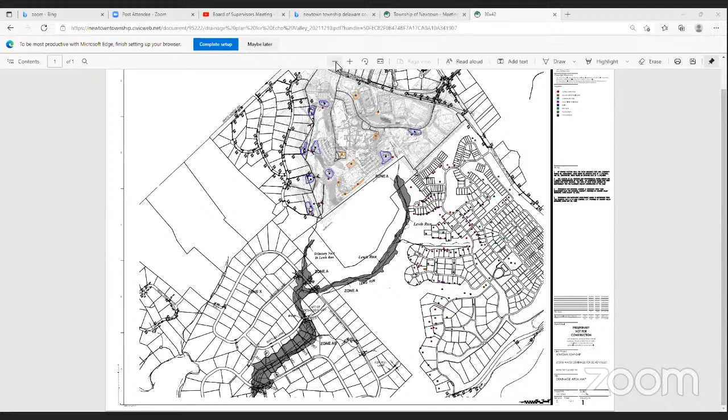Okay, so to the left is the Whitehorse development, you can see, and if we can zoom in, let me see—so you can't give me control now, Stephen? I don't think you have control of the mouse.

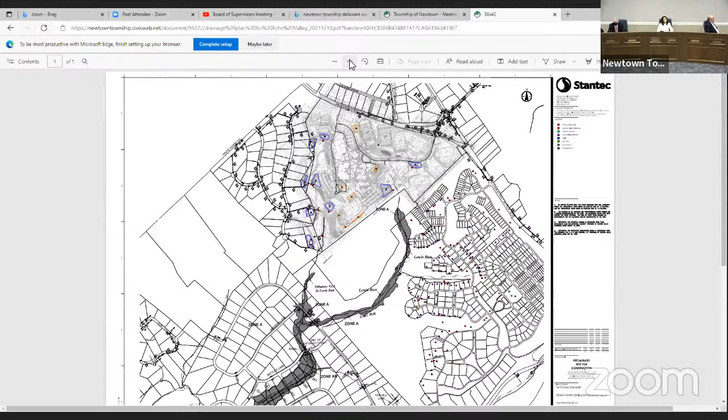Okay, if you could zoom in—yeah, Whitehorse is right off of Whitehorse Road. It contains Bridle, Withers, and Farrier Lanes. The 4 basins are positioned along that tributary that drains down into the 50-acre preserve and then into Echo Valley. As I mentioned, those basins are collectively providing almost 50% more volume than they were intended to do in the design.

Due to the timing of the approvals for that project, because of when it was proposed, it's not part of the annual inspection program that we have, which was set forth in the amendments to the stormwater ordinance in 2013. But the exhibit on the east side of this tributary shows the development of the school's campus with a variety of control facilities, including 8 infiltration beds, which are shown in orange.

They are the ones more integral to the specific locations. There are also 4 conventional retention basins and 1 wet pond that the school uses to actually irrigate their fields during 8 months of the year.

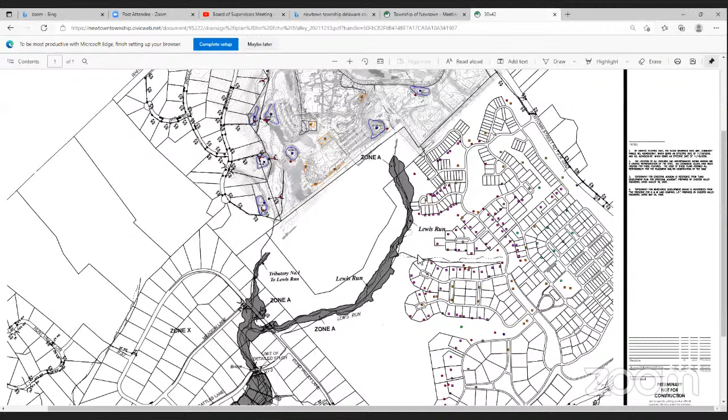Over the past year, we've performed periodic inspections and site visits to ascertain the proper functioning of all of this in the 600 some acre drainage area. It's just about a square mile that drains down to the confluence of the tributary to Lewis Run and Lewis Run, right about the intersection of Echo Valley Lane and Meadow Lane. It's very close to there.

Of note were the visits we performed on September 2nd following Hurricane Ida, and again during a storm burst that was fortunately during the day on September 23rd. On the day after the hurricane, every basin in the township, and especially in this area, was observed to be nearly full, but not overflowing, and appeared to be functioning properly.

During the storm on September 23rd, observations showed the collection of flow, most especially within the Whitehorse development and the series of inlets they have there, being very effective without any bypass. As engineers, we do calculations for the spread of flow along a gutter line.

PennDOT standards are set up so that if you have more than half of the travel lane inundated with water, you've got to provide another inlet. I saw zero cases where any flow was even escaping the inlets themselves, and they only stick out from the curb line by 2 feet. So my observations in this entire drainage area show that everything is functioning properly.

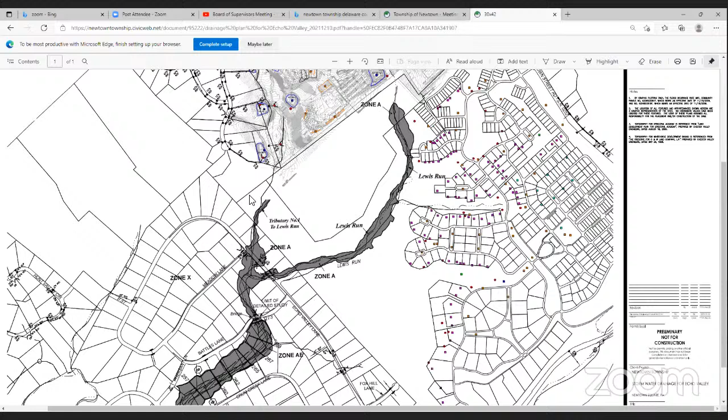Eileen: So the area behind the 50-acre preserve, right there, that whole little rectangle, the L shape that goes behind there, there's significant washout, there's significant trees falling that weren't like that 10 years ago. So what do we attribute that to?

Well, it does happen in natural areas even, and we're experiencing that all over the township. It's attributed, I believe, to the more intense, frequent storms.

Okay, but those three large basins for Whitehorse are right next to this area where this is happening. And the other area is the preserve, where obviously there's been no development. That's all green. So the only development is the Whitehorse side and the pond. Whitehorse and Episcopal both drain down into the 50-acre preserve.

I can't tell from that because there's no grades, but there are elevations on the portion that contains Episcopal. They are all elevations, you see the shaded steep slopes? That area comes down on that portion, a tributary to Lewis Run, with a lot of water coming down from there that wasn't coming down 10 years ago before these guys were developed.

So the question is, are you sure those ponds are operating properly, letting the water out on a timed period? Because to me, the only way you'd have that much significant rain and washout is if these ponds or drainage facilities weren't operating properly, because they should be capturing all that water and letting it out over time, correct?

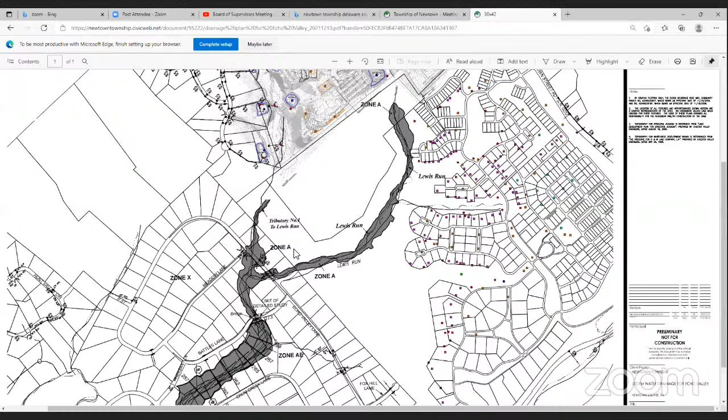Stephen, if you could pull the map down again just to show Whitehorse itself. You can see at the upper part of the map, the first basin, the system from the cul-de-sac goes through the yards and is piped to that basin, then discharged into the tributary. The next system discharges to the basin and then into the tributary. The third one is at the intersection of Bridle and Farrier, goes to the third basin, and the end of the cul-de-sac takes it to the last basin. Everything is being collected and taken to that point.

Could it be too much water's coming off Episcopal too quickly? Because they don't really have a lot of basins there. But every project they initiated had either an infiltration bed, or an infiltration bed and a basin combined.

How do we know the infiltration? How do you test the infiltration bed to know it's capturing the right amount of water? Again, by the collection system. If it's functioning properly, which the inspections show it is - there was one bed along the headmaster's house, right where the arrow is, yep, that one. When we looked in there, there was some trash and debris, because things get into inlets. We see it all the time, but nothing to impact the capacity or the ability to infiltrate. It just needed the chamber cleaned out.

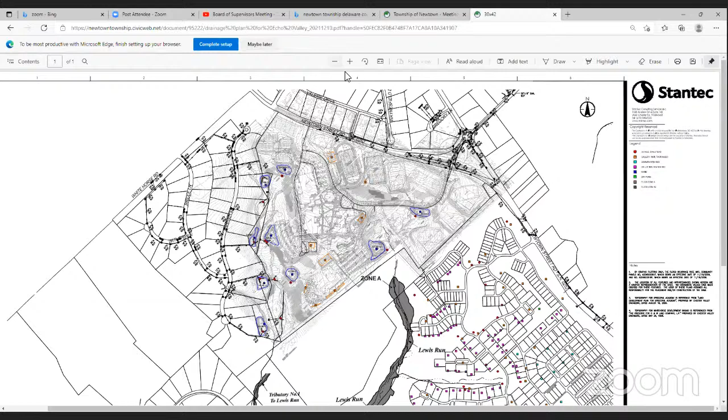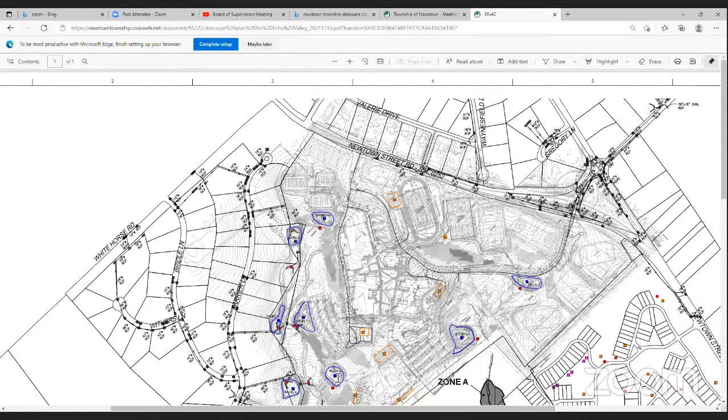I'm just thinking there's still too much water coming off in a big storm. I was actually surprised on a couple of site visits that there wasn't more flow in the basins - I think it's Basin A. I was surprised at that, but what I saw was that infiltration was actually working, and that's why the discharge didn't result in a substantial amount of flow in the basin itself. Because I had expected after Ida especially to see major amounts, like I did in other locations. That told me the infiltration bed was doing its job.

I think we still need to visit that again. I think there's just too much water coming out of that property that wasn't coming out before, at too fast a rate, because there wouldn't be that much erosion otherwise. I have a creek behind my house, been there 15 years, and it's basically the same as when I moved in. The one that comes out of Episcopal into Echo Valley, there's severe erosion there - severe erosion.

Something's got to be causing that. To my mind, it's volume, flow - too much flow too fast. So it seems like whoever designed that might have designed it to meet requirements, but it's not meeting the requirements because it's washing out the properties below it.

The entire Episcopal Whitehorse property was all done by Chester Valley engineers. You have to have a meeting with them and have them come out here and look at what we're talking about and say, hey, listen, 10 years ago it wasn't like this. I don't care what your design says. People make mistakes and there's a mistake there.

We have people in my neighborhood that have significant erosion - I mean, significant. I'm on a creek and I don't have that erosion. I've been there 15 years and I maintain it, I clean it out. If there's trash, I clean it out. If there's trees that fall in it, I take them out. And what we're seeing here is significant erosion, and it's coming from Episcopal.

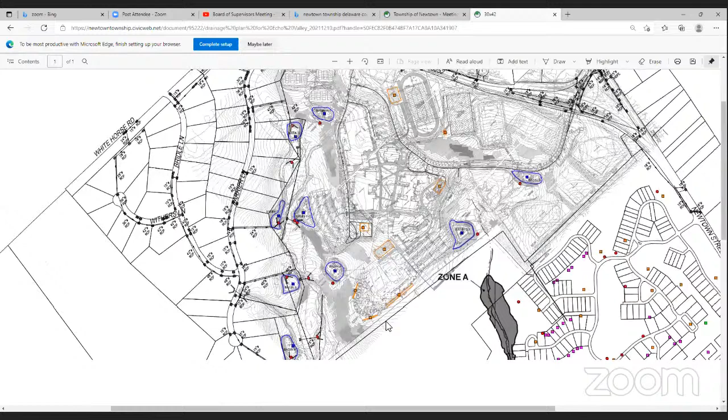I don't know if it's coming from Whitehorse - they have a lot of big basins, but it's coming from Episcopal. I do believe the basins associated with Whitehorse, because the overall project initially was done for all residential. I think that Basin F up top near the tennis courts may have actually been designed for the residential area first, because it was before my time - I don't have that firsthand information.

I think we need to have a meeting with them come spring, and we need to have a come-to-Jesus meeting with them and say, hey, listen, you're causing significant runoff. You're causing major erosion. I don't care what somebody's calculations say - calculations are wrong. You can't see the erosion like these people are getting in their yards, coming closer and closer to their house that they didn't have when they bought that house 20 years ago.

I don't care, it's the development's upstream that wasn't there before. So if their development is impacting these residents, then they have to fix it. If they had to put a big basin at the bottom and have it slowly drain out over time, that's what they have to do. I don't care what the plan says. I don't care what was approved.

It's significant erosion. I don't have that erosion. I live off of - I don't know what one I'm off of, but I'm off of right where it says zone A, B - and I don't have that erosion. I'm right off the old road into the estate, into the old Echo Valley estate, and I don't have erosion. The water goes up 3-4 feet and goes through there in these big storms, but it doesn't erode anything.

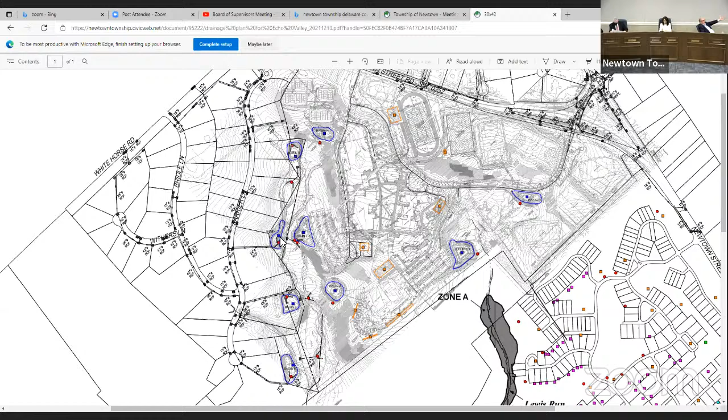So again, the water that's coming off of Episcopal needs to be investigated. If they've got to get Chester Valley out there to look at this, we need to have a meeting with them, and we've got to say, what are you going to do to fix this? It's not right to these neighbors that are getting major erosion by their houses. It's just not, and it's obvious where it's coming from. We've been talking about this now for 3 years, 4 years - it's time to act.

That's just my opinion as one person, but it's not right. There is a problem - I don't care what the calculations say, I don't care what the design says. The problem is you see it's getting worse. I'm in the same development and mine isn't getting worse. So what does that tell you? It tells you that whatever Episcopal did, it's not working. It's obvious.

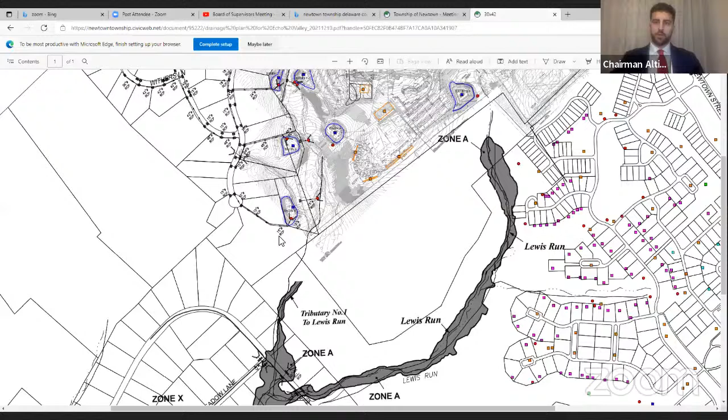So Eileen, what's the purpose of this presentation? Are you coming to us with a solution, or is this just informational? This was only information.

There are questions as to whether these work or not. I can only speak to as designed. I understand, but we need to have a meeting with them. It's way past the point that it doesn't work. There are solutions calculated on paper that don't work in reality in many situations, and this is one of them.

Maybe you're right, maybe it was designed for residential where there's a lot less impervious coverage, and maybe that's what happened here. No one ever caught it or checked it. You weren't involved then, who knows who checked it or what was missed. We don't know, but it's obvious when they're getting this major erosion, it's getting worse and worse.

And in the same development, on a different spur, that creek system is not having the same problems, and they're getting just as much rain. We're in the same neighborhood. Mine's not eroding anywhere near the pace that this is eroding.

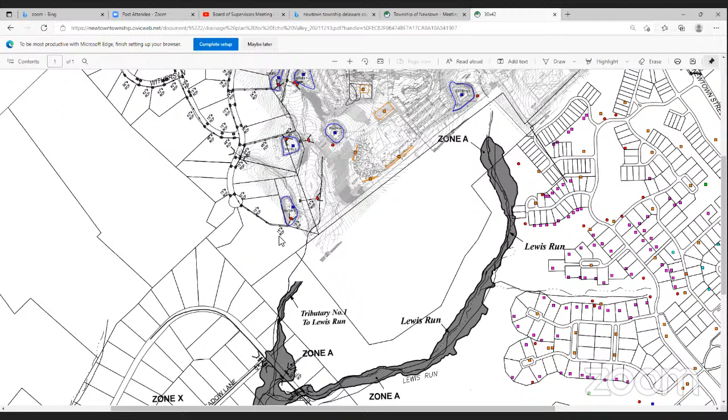Where it says 269, is that where you are? Right around the bend? Yeah, I can walk that whole thing and it looks like it did 15 years ago.

Well, that's kind of good news, because initially there was a lot of concern that what was coming in through Fox Hill and that tributary was a problem too, from Episcopal. So if that's the same, we can focus our efforts exclusively there.

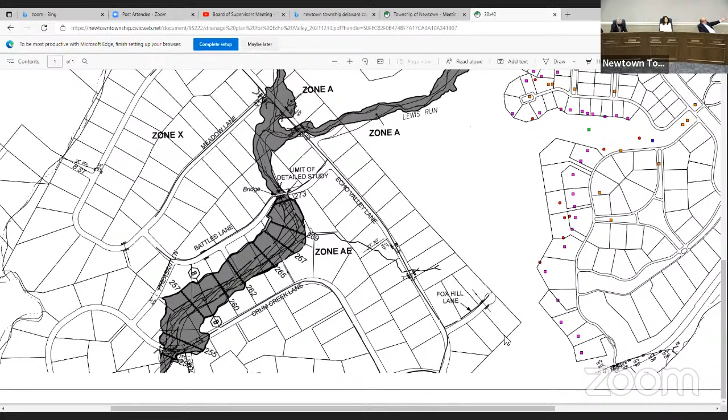If you look at Fox Hill Lane, that property has a huge area of trees, a huge planting right along Goshen Road. That whole area is a huge green space, and the houses there are bigger with mostly green space yards. The driveways are very small, and even though the houses are big, they're far from the property. They have all those facilities and green space, they planted trees, so there's all that green space to absorb the water. Whereas if you go over there, you have so much concentration right at that point, and it's all developed. There's not a lot of green space there.

Again, I don't know, maybe you're correct, and maybe since you weren't here, it was designed for residential with a lot less impervious coverage. It was never adjusted and no one ever caught it. It was a mistake or an oversight, whatever you want to call it. But I think we need to do further investigation on that area and bring their engineer in to tell us what they did and what they're going to do to mitigate the situation. We can't let it continue, at some point it's going to get to these people's houses.

Does any other board member have anything they want to add? What I think we could do, Mike, I heard you say you want to have a follow-up meeting with Episcopal Academy. Eileen, if you or Steve want to set that up, I will join that as well with you, Mike, and we can see what we find out and bring it back to the board, unless another board member has a burning desire to do this. I'll jump on it with you then, Mike.

Do any other board members have any questions for Eileen or any comments on this? Seeing none, we'll move down to reports. 11.1, the report from the police department. Chief Lunn, I don't know if you have anything else to add or if any board members have anything they want to ask the chief. Seeing none, we'll move down.

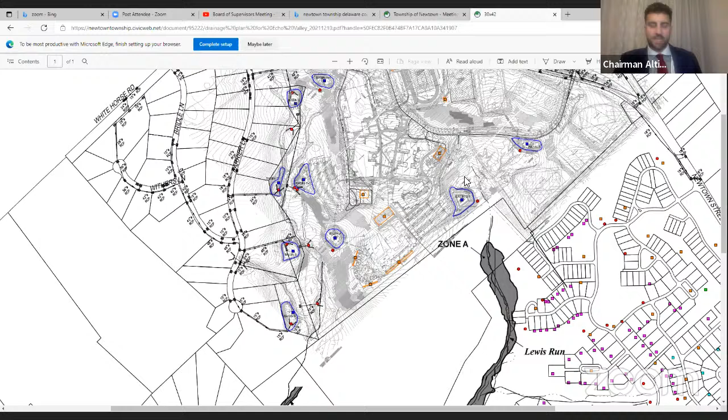I just want to know one thing, Steve. Can you tell us if they got their K9 unit car yet? Yes, they did. Oh, they got it finally? Good, they did get the payment. Great.

Any other board discussion? All right, 11.2, report from the Public Works Director, Mr. Sharretts. Does any board member have any questions for Mr. Sharretts, or Mr. Sharretts, do you want to add anything to your report?

Seeing none, we'll move down to 11.3, report from the Building and Codes Officer, Mr. Reczek. Mr. Reczek, do you have anything you want to add, or did any board members have any questions for him?

Seeing none, we'll move down to 11.4, report from the Finance Director. I know Mr. LaFiata is out, so does anybody have any questions for Mr. Neese regarding the finance report?

Seeing none, we'll move down to the Library Director, Arlene. Does any board member have any questions for Arlene, or does Arlene need to add anything to it? All right, seeing none, we'll continue.

11.6. Chairman, I'm sorry, if I could for just a moment. I just wanted to let the public know that the library continues to be closed due to some staffing issues related to COVID, but they are doing contactless pickup, so if somebody wants to come in and do that. Just want to make sure they're aware of that. And if they're looking for the times, they should check the library's website. The Newtown website is now directing everybody to the library website.

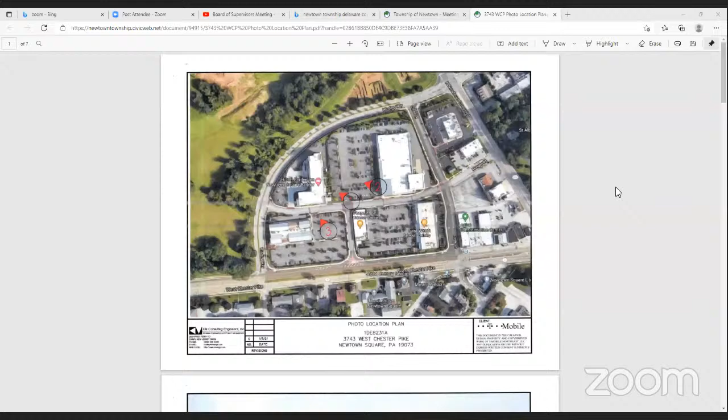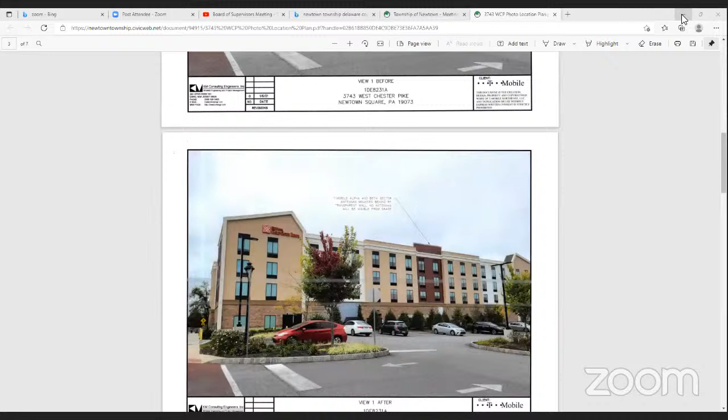And you said that the existing roof is 43 and the overall height of the building is 57. Is that correct? Let me just double check, I'm looking at the plans again to double check the elevations. The elevation depiction on the zoning drawings are on sheet Z7 of the plans that were submitted. I think what's being scrolled through now is the photo simulation, which I'll get to in a minute. But on sheet Z7 of the plan, it shows the existing rooftop, the flat part of the roof is 43.6 feet in elevation above grade, and the actual top of the building is 57.7 feet.

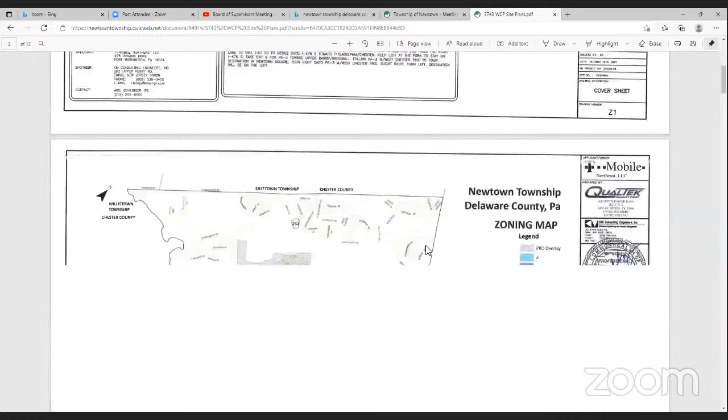I'm not seeing that, but okay. If you go to sheet Z7, we'll give it a minute to scroll through.

So while Mike's looking at the drawing, let me ask you another question. I'm just looking at the picture of the firehouse with the structure that's there right now. It looks like one structure that's supporting many antennas. So obviously one of those is T-Mobile, but wouldn't you say that some of these other antennas must be antennas from other carriers, and there was some coordination to mount them all on this common structure on top of the firehouse? I'm not aware that there are other wireless carrier antennas on that site.

For example, at the new site, T-Mobile will have 9 antennas total. So it could well be that the antennas located on that structure are in fact just T-Mobile wireless communication antennas. Now, I'm not saying there's not some other whip antennas that might have been used for local communication, perhaps by the fire department, but I'm not aware that there are other wireless communication carrier antennas. What I hear you saying is, I'm looking at the picture right now, you're saying there could be as many as 9, and there looks like that there could be that many in the picture I'm looking at. Hard to tell, but to your knowledge then, Verizon, AT&T, other carriers, to your knowledge, would not have antennas on that existing structure.

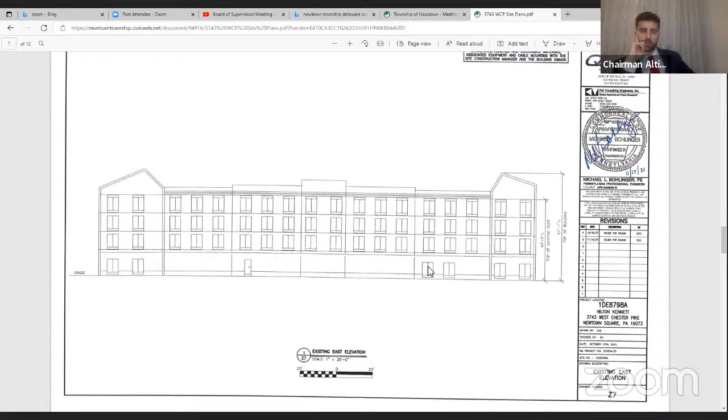Let's talk about what the new ones will look like. I know you submitted the plans, but if we can discuss it. If you look at the plans before you, go to sheet Z11.

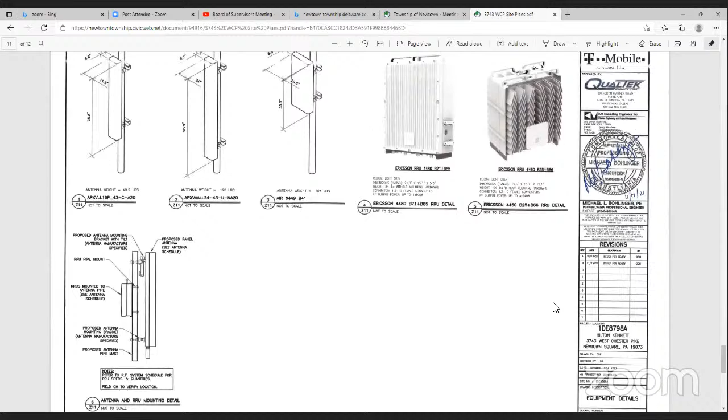Like boxes? So like boxes? Now, the boxes that are shown there are what are called RRUs, which are part of the antenna functioning, but they're not the antennas themselves.

On sheet Z11, to the left of those boxes are some panel structures shown on poles, and it's the panel structures that are the antennas. So these antennas will be panel-type structures as shown at the top left corner. The RRUs are additional equipment that goes at the base of the antenna, and that assists in the transmission of the signals.

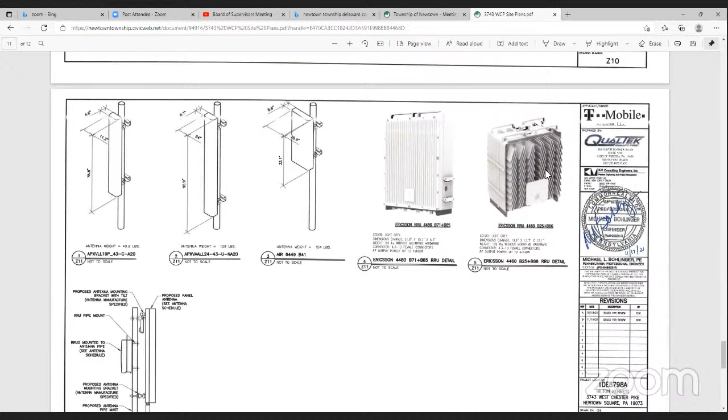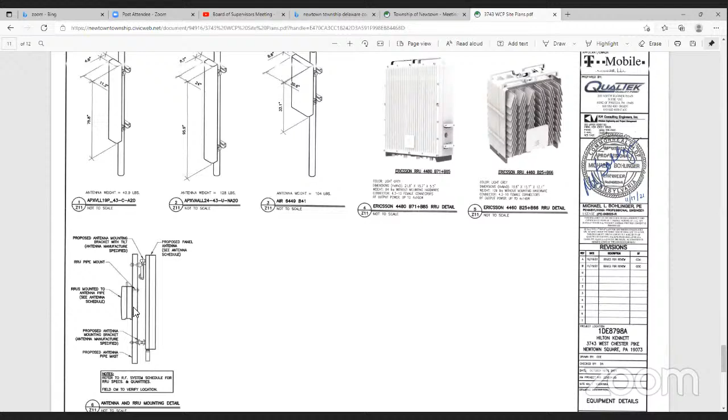If you go down to the lower left-hand corner, that gives you a side view of the antenna mounted on a pole. So the pole is the center structure, and the panel antenna is located to the right. Behind the panel antenna, also located on the pole but facing in the opposite direction, is the RRU unit.

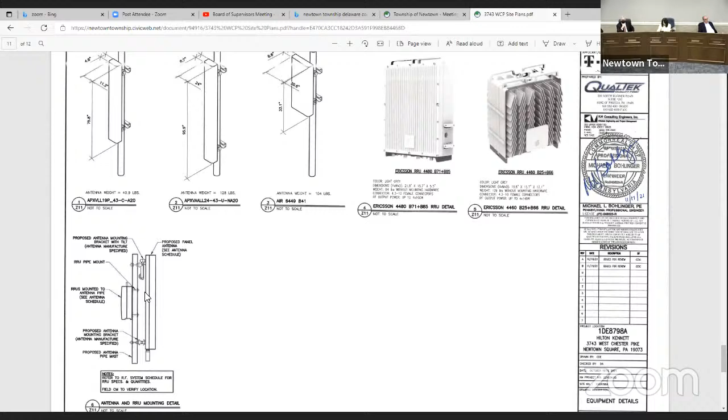So how high, what's the height of the antennas on top of the roof? How far do they move? If we go back to sheet Z10.

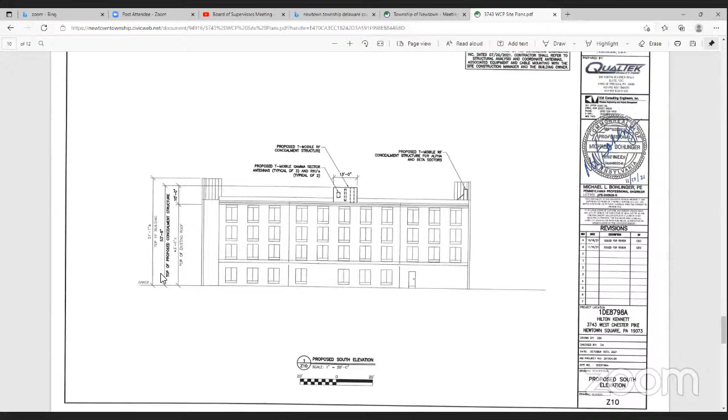That shows an elevation view of the building, and it shows the proposed stealth screening structure. Behind that is located the antennas and the RRUs, on the right-hand side of the elevation drawing. It calls out the height of that structure, which is going to be 53 feet 6 inches in elevation above grade.

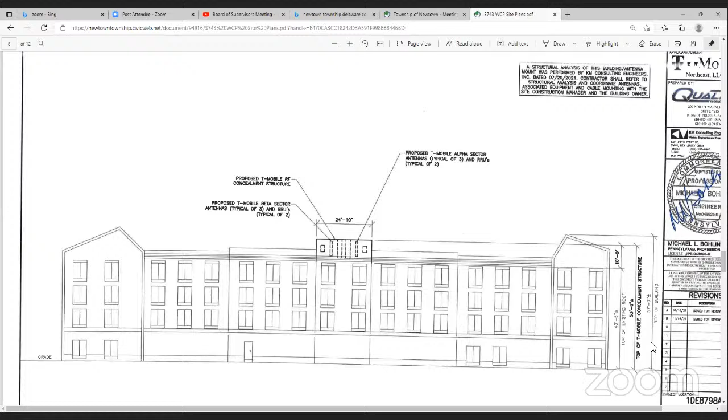So, 10 feet above the top of the roof, say? Correct, yeah, it's going to stick up about 10 feet above the existing flat roof line, but still below the total roof line elevation of the building. But the actual antennas will be hidden behind the structure, so you won't really see the antennas themselves.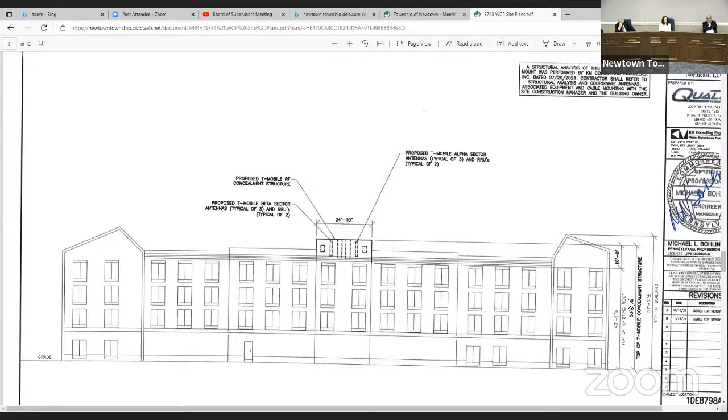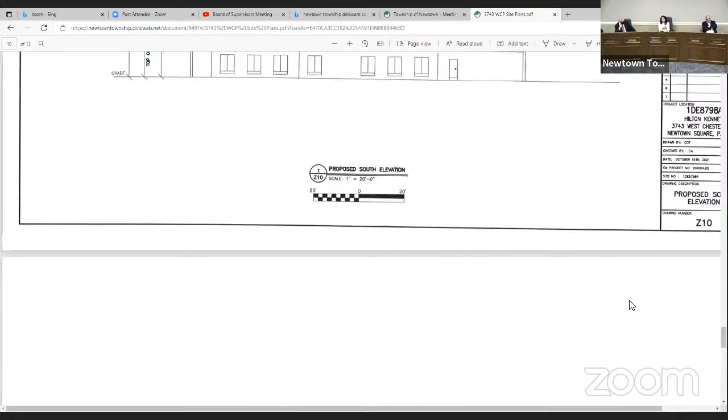Correct. Okay, how about on the back side of the building? So people who were viewing this from across the way, the Ellis Preserve or Winding Way, looking from the other direction—what will they see? It'll be the same thing from the ground level. You won't see anything because those will be hidden behind the screens. The best way to picture that is to go to the photo simulation that we submitted.

It's the second to last item on the list on your agenda—it says current site and photo sims. What about people in the buildings that are multiple stories right next to this building?

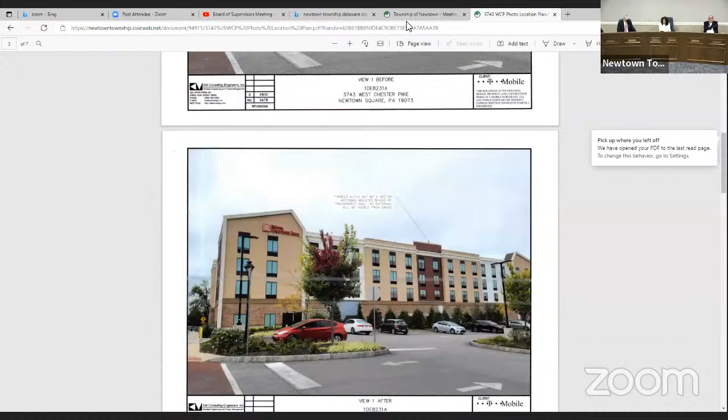So they're not going to see this roofline, and they're not going to see any equipment on the roof? No, the only way you'd be able to see that would be if you were able to look down on it somehow. Well, you do.

The Charles Ellis buildings next to it are higher. The elevation from Charles Ellis Drive is higher, so you're going to see the back of it. I'll tell you what—if we take a look, when you look down you can look at the top of the roof. Mainline Health is higher.

And then if you go to the next page of the photo sim, that shows an overview of the proposed site. It shows the Hilton Garden Inn, and with the circular red numbers, you have 1, 2, and 3. Your drawing's correct, all those trees are gone.

To the left of there is a bunch of multiple story buildings. So did you take a perspective from those multiple story buildings? The building right next to this is a five-story residential building. There's also a medical building, and an AmeriHealth. So at that level, they're going to see the roof of this building. Are you hiding this from view from those buildings also? You can't just say it's from the ground.

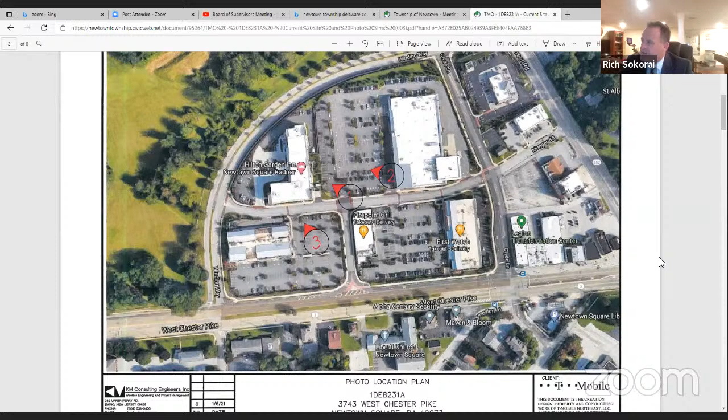Mike, this is Rich Sokorai. What I suggest is, since you're going to have to go before the zoning hearing board and come back anyway, why don't you coordinate with the folks who did this point diagram and see what it would look like from those other vantage points. You'll have that information from the landlord of the overall area, and there are some elevation differences that might favor what you want to do. I'd take all that into consideration, and I think the board would appreciate that other perspective.

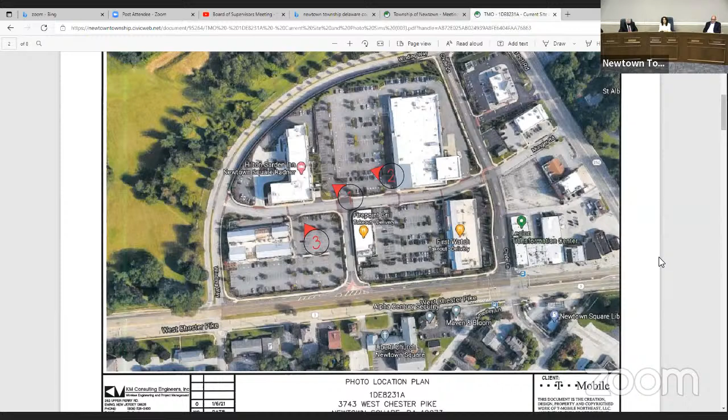And also, if we could have a photograph of what these look like on another building of very similar size, just to show us what the equipment looks like. I see a drawing and I'm well versed in reading plans, but I think it's good if you can give us a photograph that also shows what it's going to look like.

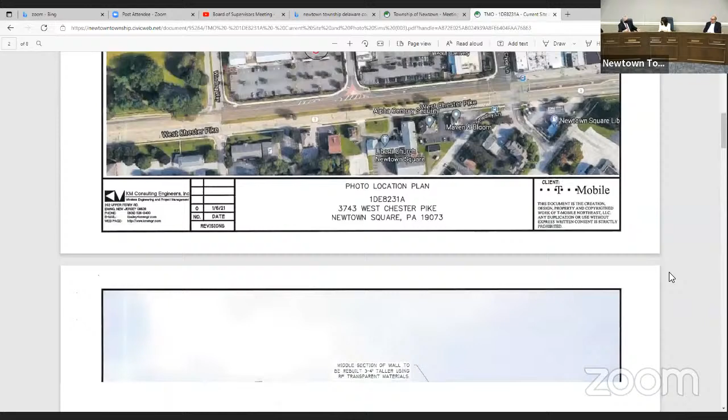Yeah, so the facade that goes across the front means you can't see the antennas, like you explained, because they're behind that facade. On the other side of the antennas, can't you erect a facade on that side too, so the antennas are kind of boxed in? You couldn't see the antennas from any side, only the facade around them.

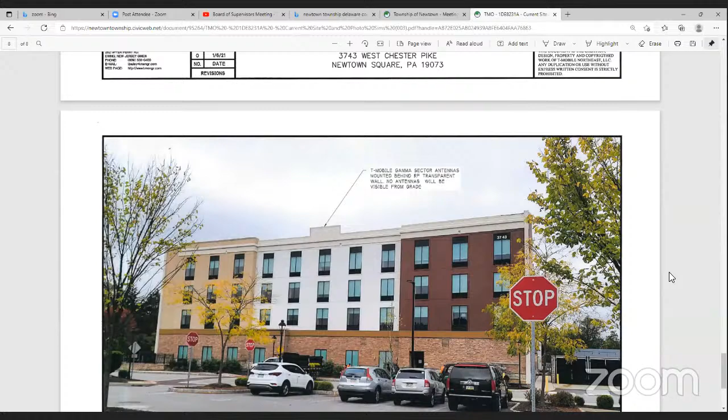Yes, I don't disagree with that. I think you could erect a structure on both sides of the antenna. I thought the concern was looking down from above. I don't know if there's a way to completely box them in and still have them function, but certainly we can explore putting something behind the antennas.

But if you put the facade around them at least the same height, you're not going to see anything from any of the other buildings. I mean, they're not that close. We're not worried about looking from the sky down, just from the other surrounding buildings. So just do the same thing on the other side. If it's boxed in, you won't see them.

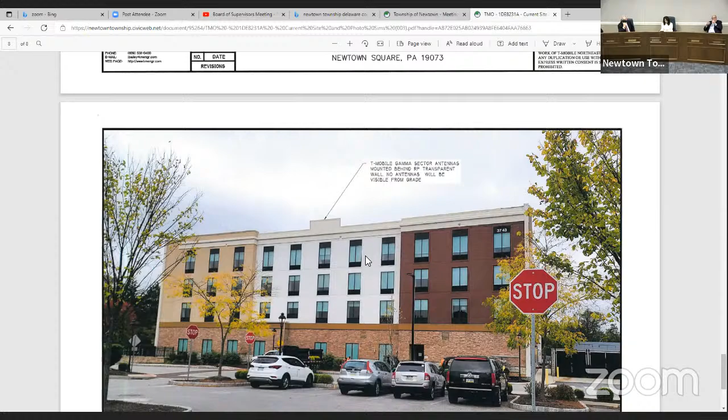Sure, and I think T-Mobile would be willing to do that, subject of course to the landlord's approval. They would have to approve that additional structure up there, but conceptually, T-Mobile wouldn't have any opposition to that.

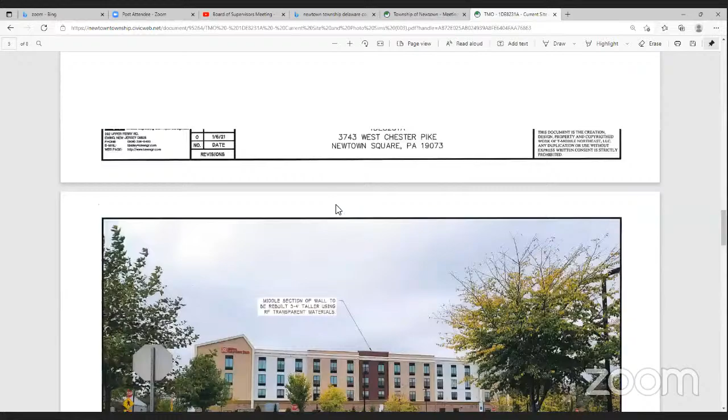Mike, do you have anything else you want to present for this? No, Mike or Rob? We'll be happy to take a look at a photo simulation, Rich, as you suggested, from that perspective, and also a photograph of what these antennas look like so you can picture them in a real world setting. What we're essentially asking the board to do is approve this. We're going to be meeting with the zoning hearing board on the 20th, and if the board would like us to come back at the next meeting after that to present additional information, we'd be happy to do that.

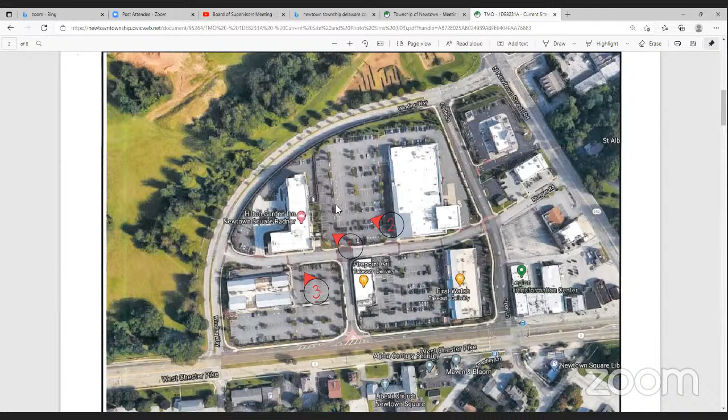I think, Mr. Sikora, do you have something you want to add? Only that, Mike, if you could also confirm that you're the only wireless facility on the old tower, meaning it can come down after you move over. Yeah, I will do that.

Is there any other board discussion? I think you're probably correct there, Mr. Rob. What I think is probably going to happen is that we're going to keep this open until you go to zoning, and then depending on how zoning comes out, you coming back to us. But that's just my opinion. Any other board members have anything they want to add? Agreed. Yes, I agree.

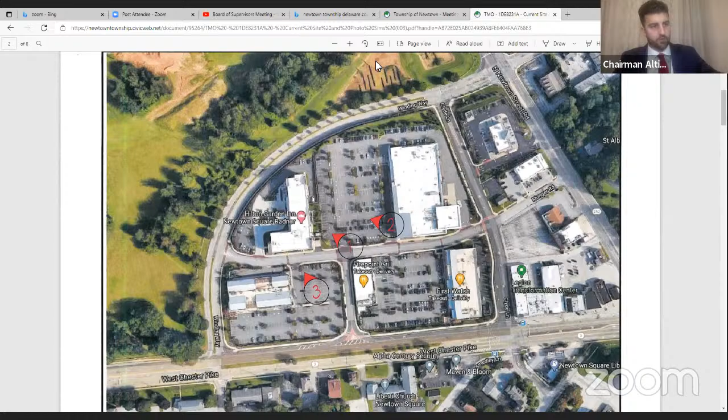Mr. Grob, what we are going to do is hold this open. We'll keep the record open, and pending your outcome over at the zoning hearing board, we'll decide whether you need to come back. If you get approval of the zoning hearing board, obviously you come back. If you don't, there's no need for you to come back before the Board of Supervisors.

I do want to add one thing, because I know you mentioned, and it's no fault of your own, that the firehouse is coming down and being demolished. While I suspect it's probably something that's going to happen in the future, I want the residents listening to know that no permits have been filed for demolition. I think it's a foregone conclusion that something's going to happen to that property eventually, but nothing has been submitted to the township regarding a demolition permit. Thank you, board members. Understood.

Thank you. All right, we'll move down to section 14, new business, 14.1, consider approving the advertisement of a new police officer. Mr. Neese, do you want to add anything to this?

The only comment I would make is that this is in the budget, and it usually takes 4 to 6 months to go through the process, that's why I'd like to get started. Perfect. Second. Motion was made by Supervisor Partridge, seconded by Supervisor Russo. Is there any board discussion? All those in favor signify by saying aye. Aye. All those opposed, motion carries.